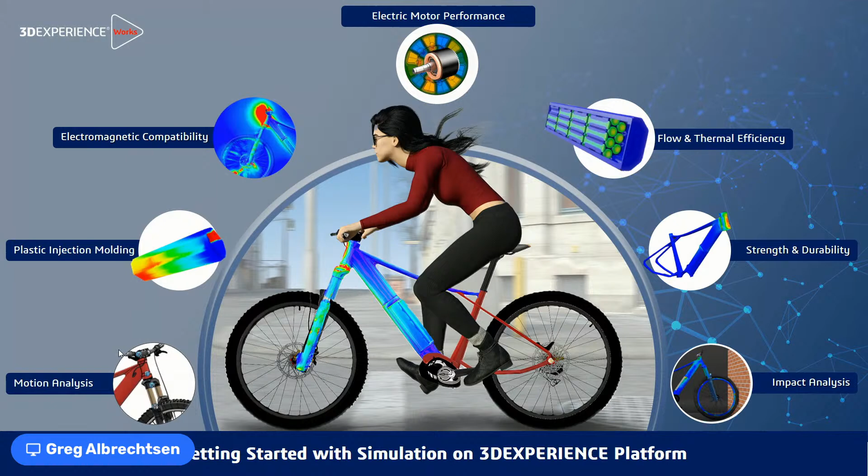So we've gone through this scenario, and again, this young lady, she's not wearing a helmet — we need to get a helmet on her, that'll be for another time. But the whole series, we're going to go through a lot of different types of simulations. I believe the next session will talk about plastic injection, and we'll go through some of that. But today we're going to do strength and structures for the frame here.

So I'm going to go ahead and close out the PowerPoint. You are a very lucky audience today because that's all the PowerPoint I'm going to show. Yeah, about our audience, by the way.

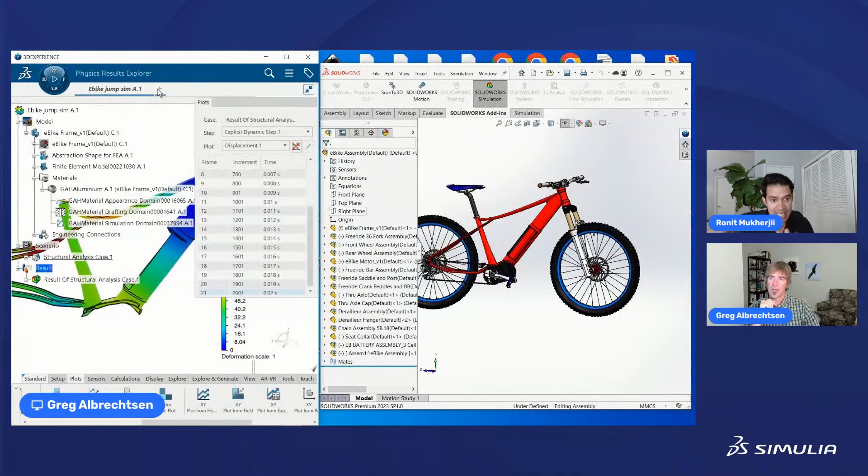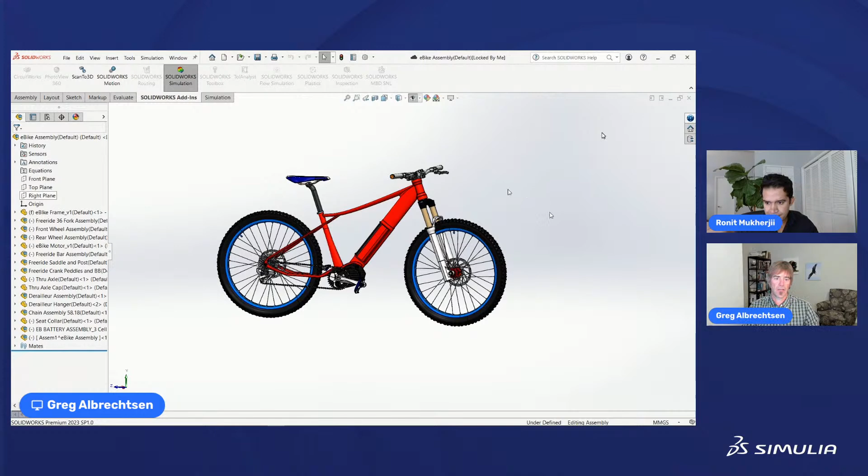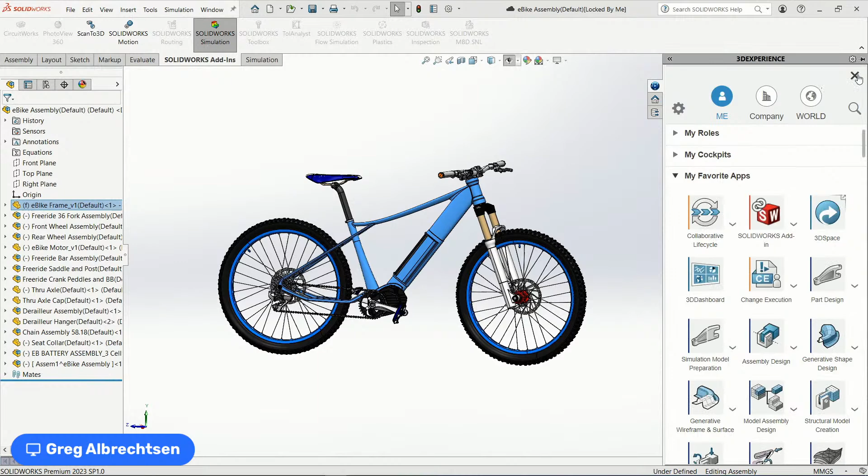Yeah, right on, thanks. Okay, so here we are in SolidWorks. I showed some different ways we get the SolidWorks information into 3D Experience — if you need more details on that, refer to some previous sessions. But I'm going to go ahead and do it. So here we are in SolidWorks with the PLM services, or UES. We get this embedded 3D Experience data manager in here, and again there's a few different ways to bring this into 3D Experience. The method I showed last time was you just highlight the item in UES that you want to open up in 3D Experience, and you can go up to the compass and pick which application in 3D Experience you want to open it in. Or we can be real fancy, and I can do a drag and drop from SolidWorks to my 3D Experience blank tab session, and voila.

Wow, that's easy, I like the drag and drop. Yeah, me too man, it's pretty sweet. It's funny doing these presentations — somebody's like, 'Hey, why didn't you do the drag and drop?' And I'm like, 'Yeah, I don't know, why not?' It's pretty interesting, the things I take for granted in the software that I just don't think of to show.

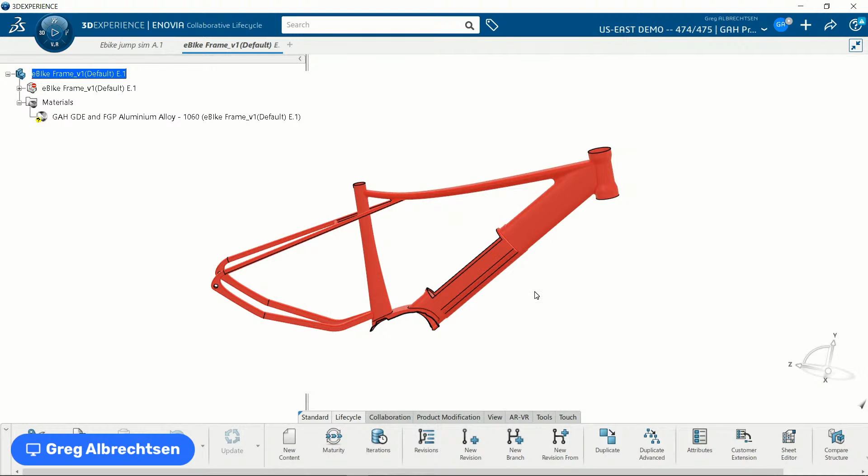Okay, so I'm going to probably be talking pretty fast, I've got a lot to show, but ask me questions as we go along. What we want to do is prepare this frame for an impact study. As I look at this frame, if you refer back to my helmet presentation, I did some shell meshing, some solid meshing, some TET meshing — so a lot of different meshing, but those different meshes were on different parts. So even though we were doing some mixed meshing, those were on different parts.

And as I look at this frame here, it's a thin tube frame. So when I first look at this as a simulation person, how do I want to do this tube? Typically, if I mesh this entire geometry with tetrahedrons, to get the kind of stress resolution I would need, I would have to have a minimum of two elements through the thickness here. And if I had two elements through the thickness on that tube, wow, that's going to make so many elements on this model.

It's just not going to give you the bending forces and bending moments that you really need to represent the displacements and the stresses. It'll probably be a little bit over stiff.

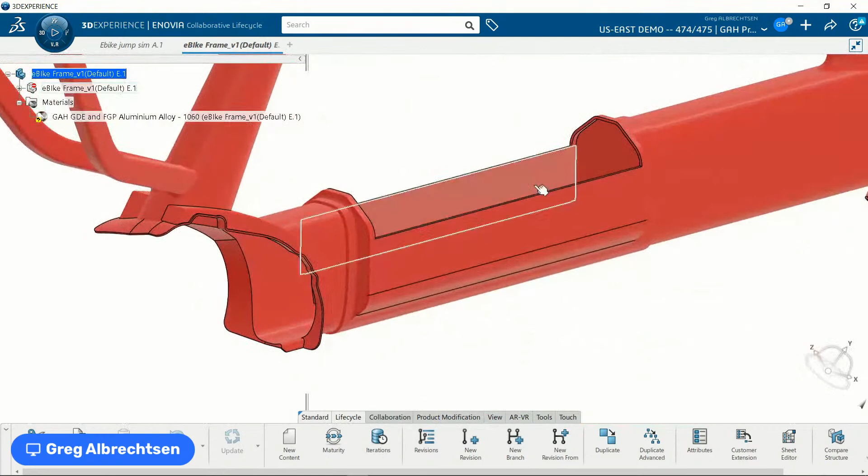So let me shell mesh the whole thing. If I think about shell meshing this whole thing, this is an e-bike, and here I have my battery compartment, which is a big solid chunky block. So if I was to shell mesh this whole thing, what happens with this section here? That wouldn't be a good approach for this section. Correct. So what do I do?

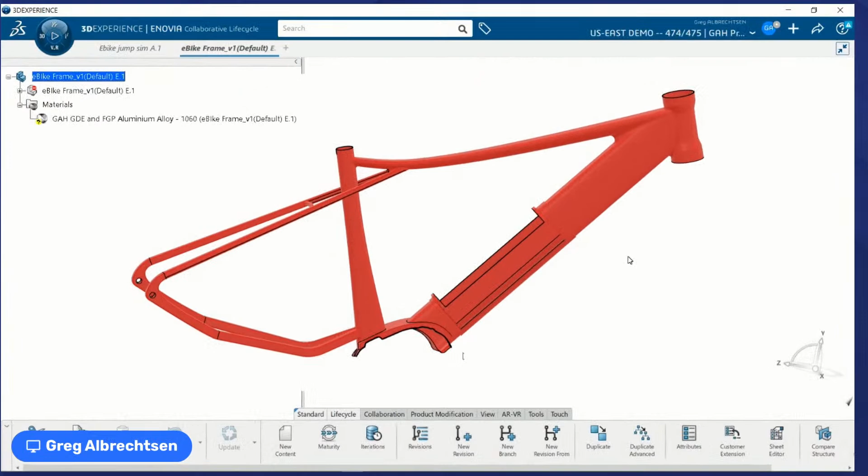Well, we have the capability to create a mixed mode mesh. I'm going to show you how I can shell mesh and solid mesh this single part. I could break this up into an assembly, but it's not really an assembly—it's still just one part, and that's how the part was built in SOLIDWORKS. So I want to use this exactly the same way that the part was built in SOLIDWORKS.

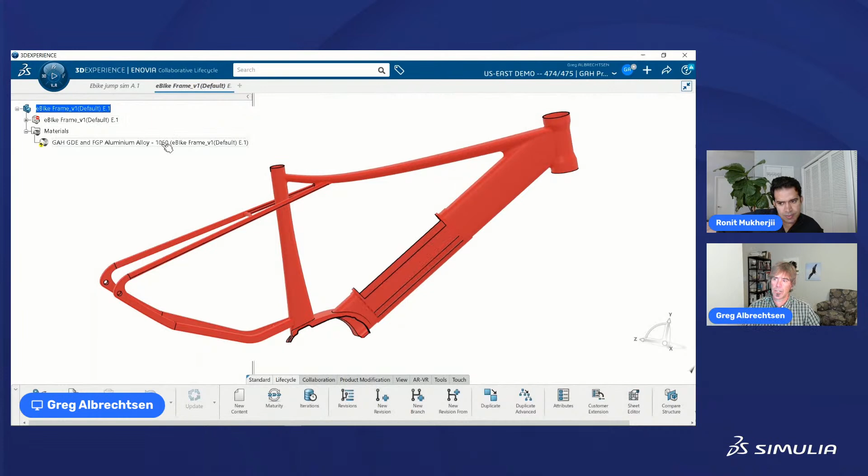First thing I need to do is prepare the geometry for shell meshing and solid meshing. So what do I need to do? As I look over at the geometry tree, here's the geometry that came through in SOLIDWORKS, with the do-not-enter sign.

So I am not able to change anything under here because we are retaining the geometry authoring tool inside SOLIDWORKS. Any change I make in SOLIDWORKS to the geometry is going to get pushed through here, and it's going to update this section of the tree.

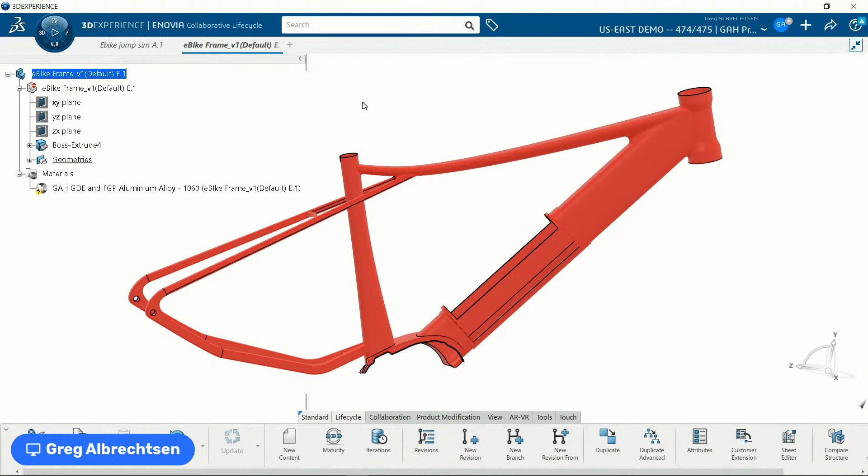That's great. That's a great point, because let's say we're running the simulation and we want to make some changes—we figure out something isn't right and we make changes. So what you're saying is you can automatically push these SOLIDWORKS design changes into our simulation tool.

Right. So I would come back here to SOLIDWORKS, make my changes, and then to bring those changes into the software here is pretty easy. I just need to go to the Tools tab, hit Global Refresh, and my new geometry is here.

That keeps things in sync with SOLIDWORKS, which is great. That saves a lot of time for setup instead of redoing the whole thing again. Quite a nice feature, I would say. Yeah, thanks, it's pretty awesome.

But I want to do some things—let's say I want to mid-surface this. Well, I could do that in SOLIDWORKS, but then I'm changing the SOLIDWORKS geometry. And if I have drawings and things like that, how's that going to affect my actual SOLIDWORKS geometry?

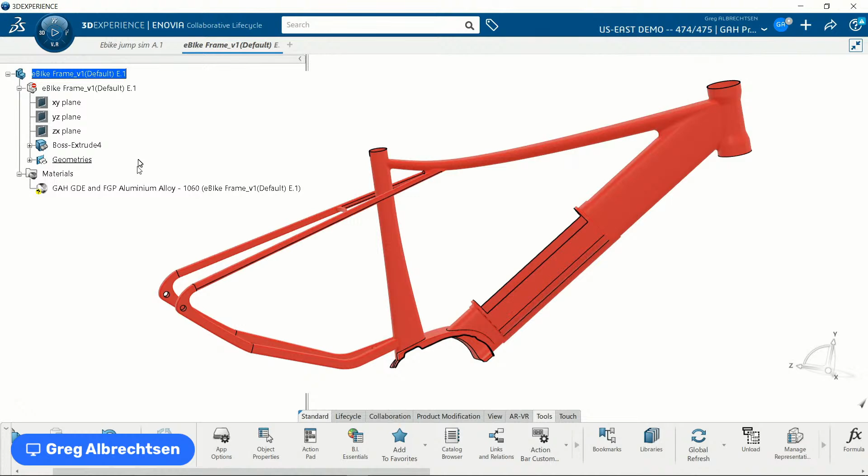So when I think about preparing a part for simulation, I like to leave my original geometry alone—let my SOLIDWORKS geometry be my SOLIDWORKS geometry—and create some construction geometry for simulation. I showed this a bit in a previous session. What I do is insert something called the abstraction shape. I went through all the different representations in a previous session, so basically I'm just creating a new representation here.

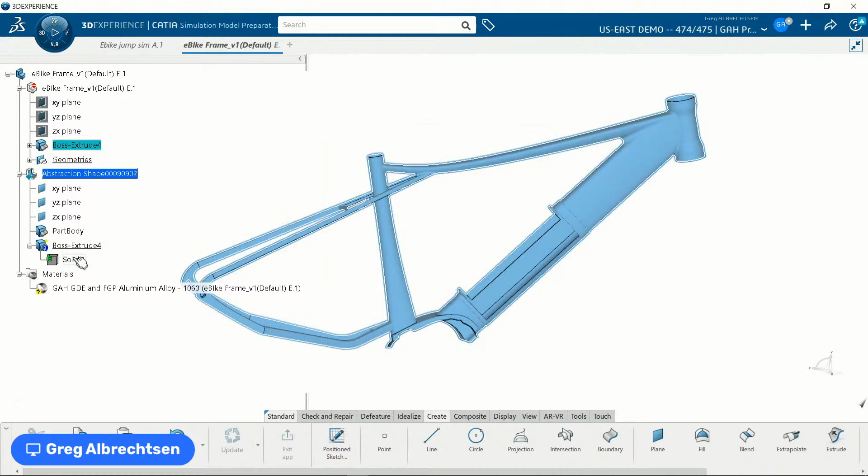What I will do is take this initial geometry that came over from SOLIDWORKS and copy it. Now here in this abstraction shape, I'm going to paste it with a link. So now this points back to that—any changes that happen in SOLIDWORKS get pushed to here, and any changes here get pushed down to here. So it's kind of a unidirectional workflow.

Right now I actually have two things visible out there, so I want to be very careful what I pick. I'm going to hide this original one—now we can just see the shape of this abstraction shape. So now what I can do is start to do some geometry manipulation of this. Let's do a partition—I'm going to create a partition, and figure out what volume I want to partition.

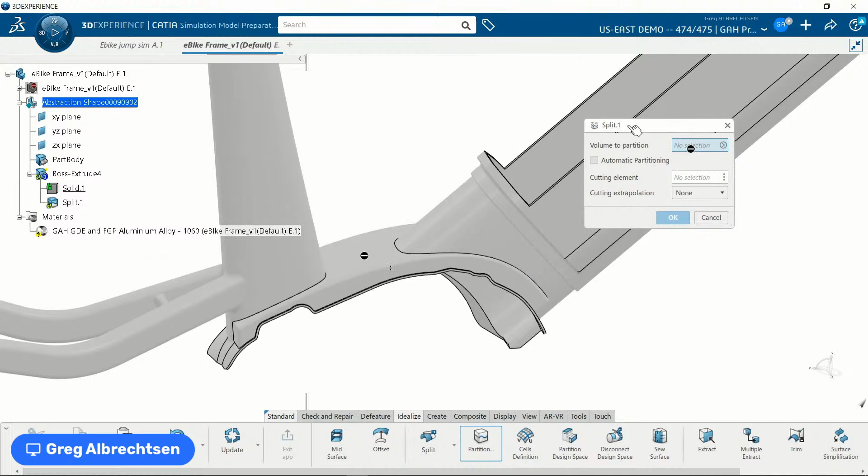And when you say partition, Greg, is this we're just splitting up the chunky body compared to the shell body? Is that what we're partitioning?

Right. So if you think of like a block of cheese, if I take a wire and cut down through the block of cheese, and then smash the cheese back together, it kind of has this suspended plane in the middle. It's still one big block of cheese, but it's got this suspended plane where I've got two different volumes of the cheese.

And for meshing, what that allows me to do is I can mesh one volume, one partition of that a certain way, and I can mesh the other partition a different way. So maybe on this side I do a coarse mesh, and on this side a fine mesh. And at that transition, because it's still mathematically one volume, it's going to merge all those nodes and elements right in that transition. So you're going to have all these really small elements at that transition, and then it's going to expand out to the bigger elements.

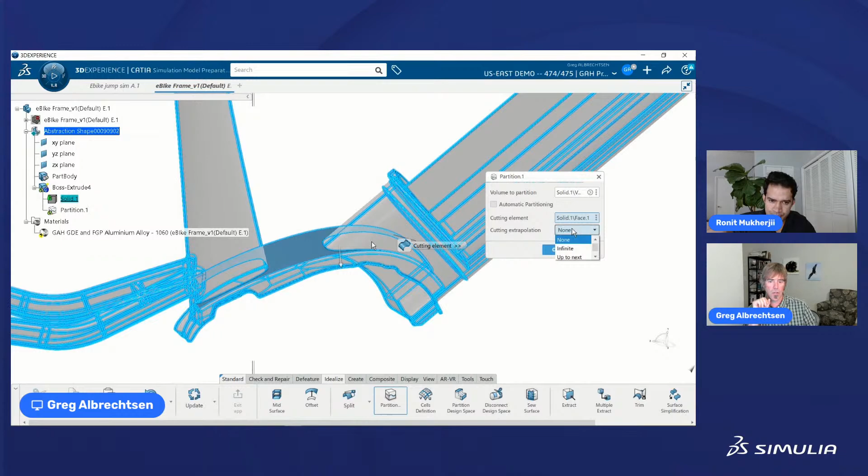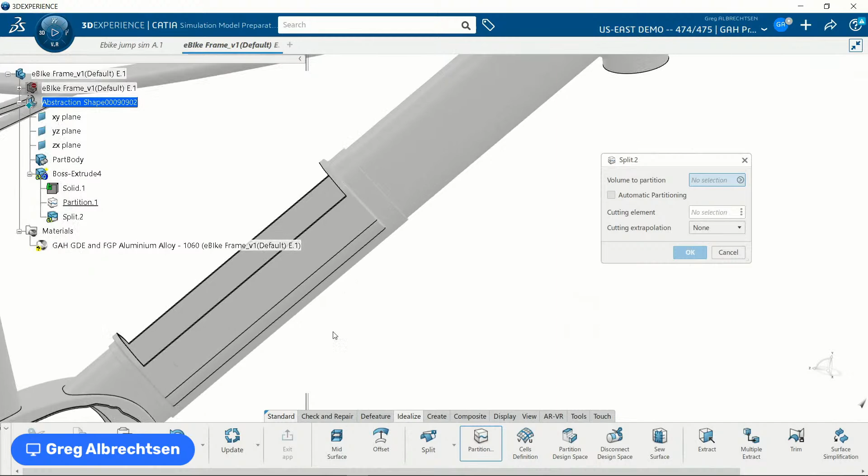Yeah, and I'm going to do that same thing here. So I'm picking this surface as a partition, and what that's going to do is put that slice right through my geometry. So now this section down here is actually partitioned off from the rest of it. And I'm going to create another partition right up here. Same kind of thing.

Let me zoom in just a little bit more. I'm going to pick that surface, and you'll see that I'm saying infinite. So what that does is take that shape of the surface and mathematically represent it as infinite, so there's no edges to it. And then if I hit OK, we can see now that my part has been partitioned right across here.

Perfect. And then my other one was partitioned right down here. So now in reality, I have split up my volume into multiple partitions. I have a partition out here, a partition down here, and then a partition that gets the backside of the frame.

Great. And the reason why we're doing this, Greg, is to be able to apply shell mesh in some places and solid mesh in others, right? So my ultimate goal is to create a solid mesh of the battery compartment, and then a shell mesh of the rest of this.

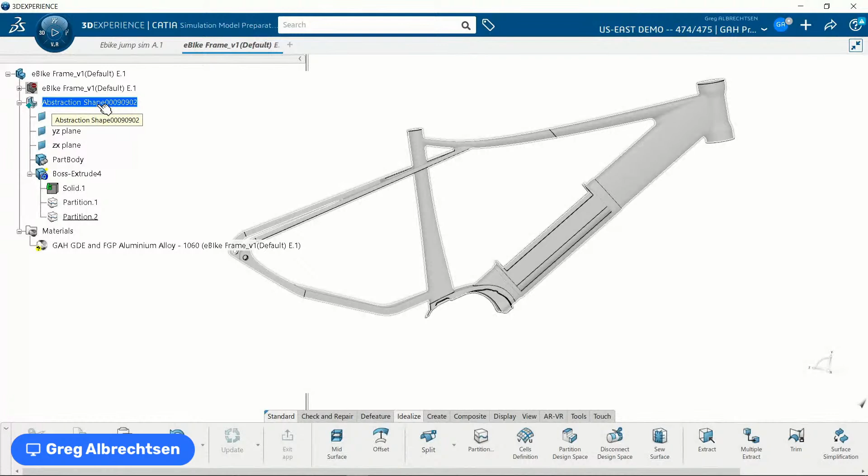Brilliant. So here, inside the abstraction shapes, I'm going to create another little placeholder called a geometrical set. And this is one of the other great powers that we have in 3D Experience. This was just geometry stuff—none of this was actually designed for simulation, except for the partition. These are just CATIA geometry features that we get because we're using the platform. So it's awesome.

So again, Greg, that's a very good point you bring out. With the platform, we have this major umbrella that we're all under, and now we have access to all these amazing applications that lie within that umbrella, and we can use that application in simulation. This whole umbrella that we're under is just very cool.

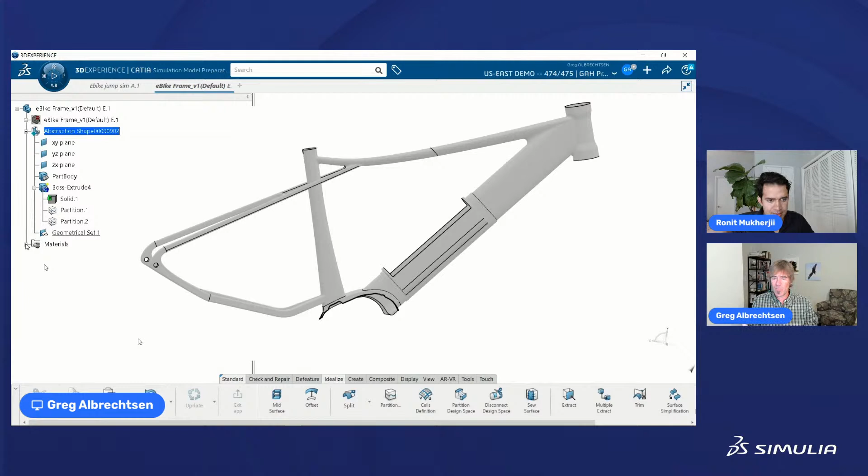Yeah, we get the data management, right? We just get all of this. Of course, we've kind of tailored some of it specifically for simulation, but it wasn't originally developed for simulation—it was developed for designing parts in a PLM lifecycle, and we just get this. It's just this added functionality.

Whenever we think of simulation or the platform, people are like, what are the physics? Can I do this type of simulation? Can I do that type of simulation? Okay, fine, that's a great thing to talk about. But there's all this other stuff that we take for granted that we get from the platform.

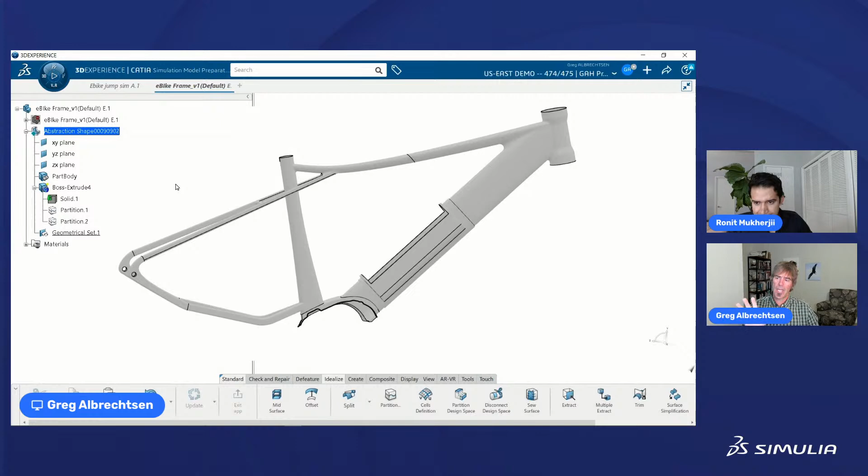That's just awesome. So with this geometrical set, this is just a personal thing that I do—I like to have all of my solids in a part body, and all of my surface entities, the surfaces that I'm going to shell mesh, in a geometrical set. You don't have to, but I just like to keep things organized. It lets me hide and show things a little bit easier. It just kind of, in my mind, I like to have those two things separated.

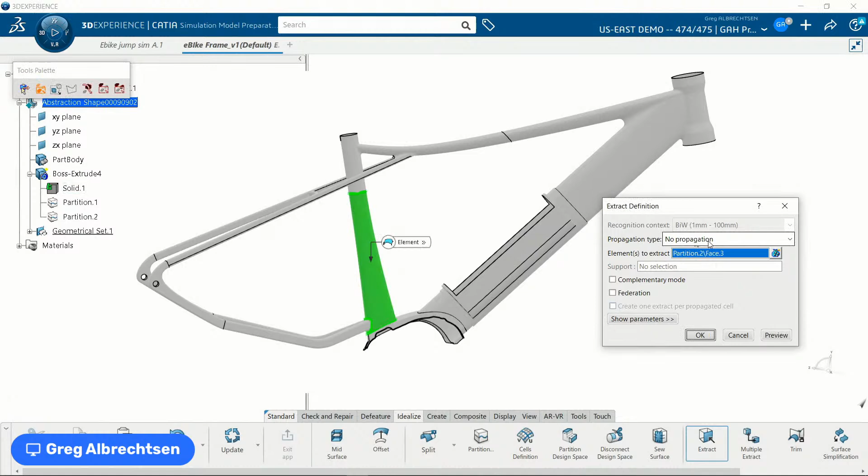So what I'm going to put in this geometrical set is an extract. I'm going to pick this surface here and say tangent continuity. So I picked that surface, and it just kind of grabbed all of those other surfaces there.

So all the surfaces that are tangent, it's automatically picking for you? Yep, it's picking all the surfaces that are tangent. So you're telling me I don't have to single click on all those to select them all? I mean, you can, but with that tool, no thank you. That's a fantastic tool. Yeah, job security, the surface picker guy, whatever. Right, yeah, it'll take all those tangent surfaces.

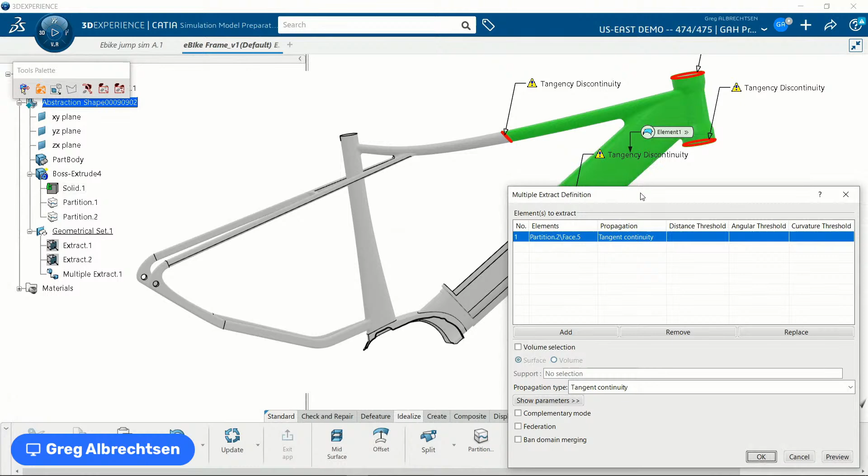And so now I have these two different ones here. I've done this in two different sections just for discussion's sake. I could have used this one called multiple extract, and I could pick this one and this one and select OK. Let me hide this. And now it's all one, and you can see that it sewed together, merged that little split right there. In reality, if I was to simulate this, that's probably what I would have done. But let me just leave it there for now, and I'm going to do some other stuff because I want to show you some things specific about meshing.

Where I have two different surfaces, this is the great thing about the 3D experiences. I have all these surfaces out here, all these different kinds of things for the surfaces, and I can just play hide and go seek all day long and keep them around as construction and use the ones I need. It doesn't really matter.

Okay, so there we are, we're done prepping this. Now let's go ahead and create a mesh. Let's mesh this thing. So how do I mesh it? I just need to go up to the compass and find the mesher. In French, structural model creation stands for meshing. So you guys learn a little bit of French today.

Because I'm doing this in a very manual way, I'm just going to create an empty fem. Automatic will automatically flavor it, taking a look at my model and trying to predict the meshes I want to put on the model. Because I'm doing a mixed mesh, it's probably not going to do that. But if you just have a solid and you're going to mesh it as a solid, I use automatic at that time. But because I'm doing a very special technique here, I just wanted to go ahead and do empty.

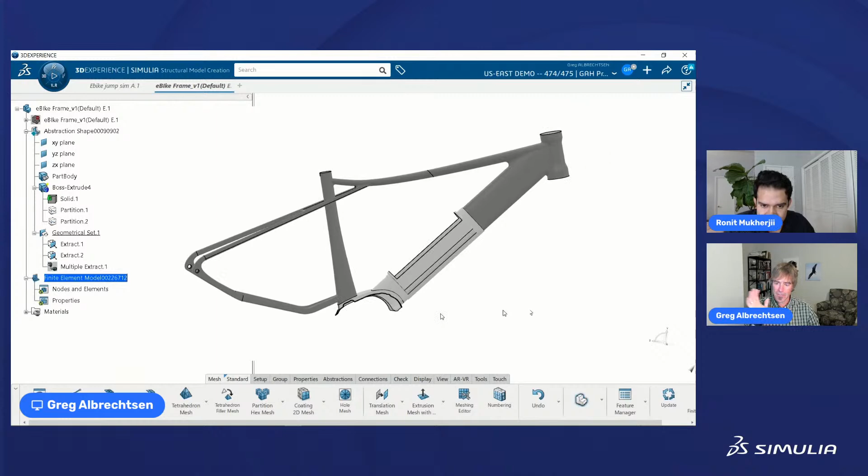Yeah, so let's mesh it. Let's do some meshing, all right. So I've gone to the meshing tab, and now I just go to Surface Quad Mesher, and I can either pick it visually out here or pick it from the tree. So let's go ahead and do that. I'll say 5 millimeters. I'm going to turn that off for now, and I'll select mesh.

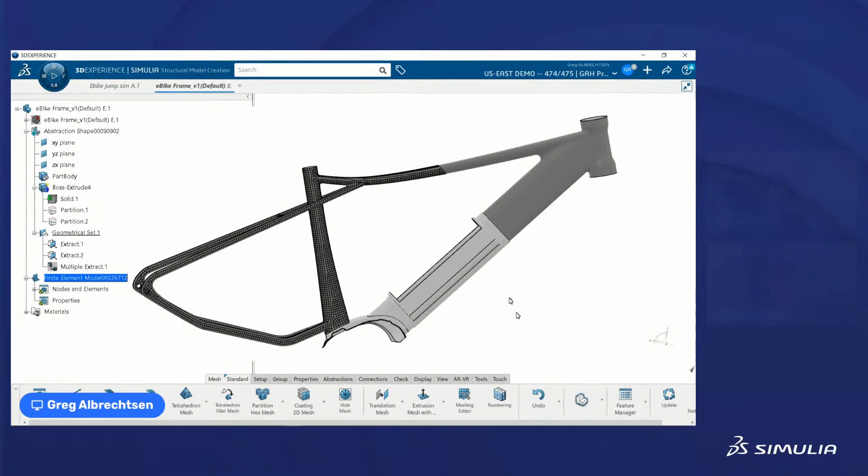We should probably point out this session isn't going to be 30 minutes like our other sessions were slated for, but I've got so much stuff I want to show you guys, so we'll go overtime a bit, at least 35 minutes or so. If you have to leave, don't—come back, or if you have to go to the bathroom, take off and come back quick, I'll still be here.

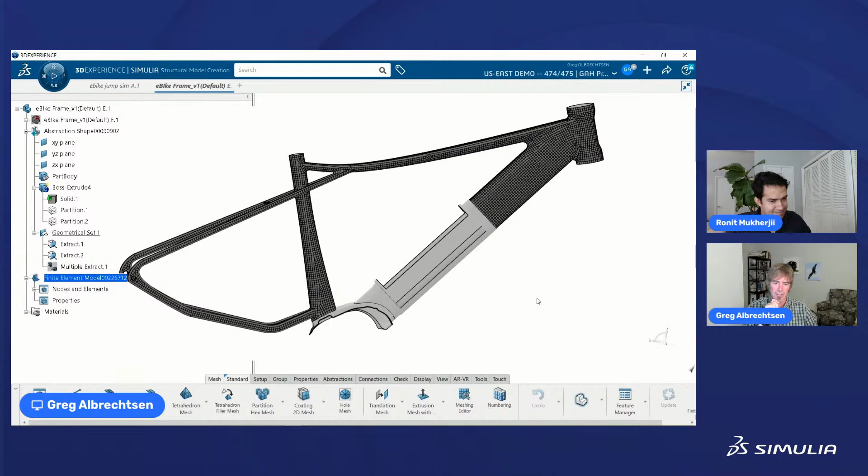I've meshed the left side, and now let's go and mesh the right side of the frame. Yeah, I'm doing this live, meshing it live—I don't like pre-canned videos for whatever reason. So I meshed both of those.

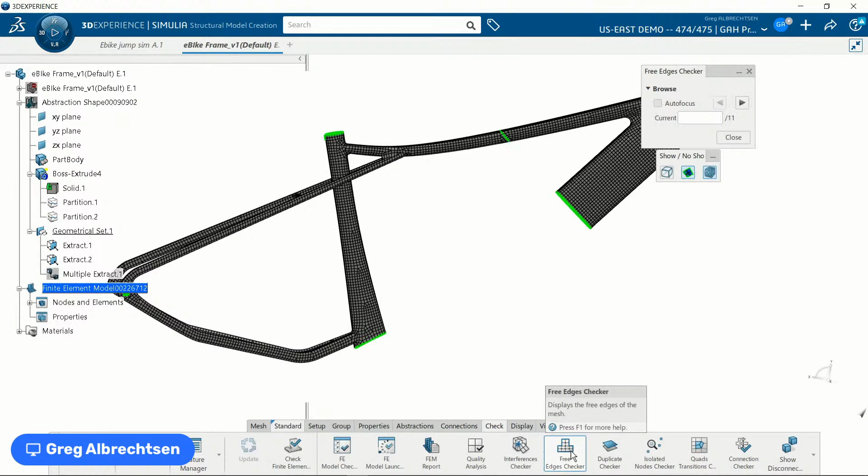Since I had two different surfaces there, let me hide the geometry—lots of hide and show today. Right where that partition was, the mesh doesn't line up very well. If I look at my checker and check for free edges, I'm getting free edges on the ends of my shells where expected, but also this free edge here. If I solve this, that means it's not connected, so it would just sit and do this.

The reason it did that is I wasn't very careful with one of my selections on the mesh. I want to toggle on this capture setting. By default, I'm not sure if this changed, but I think it sometimes shows up as 0, which is kind of a null. So I'll always have a value here, much less than the size of your mesh.

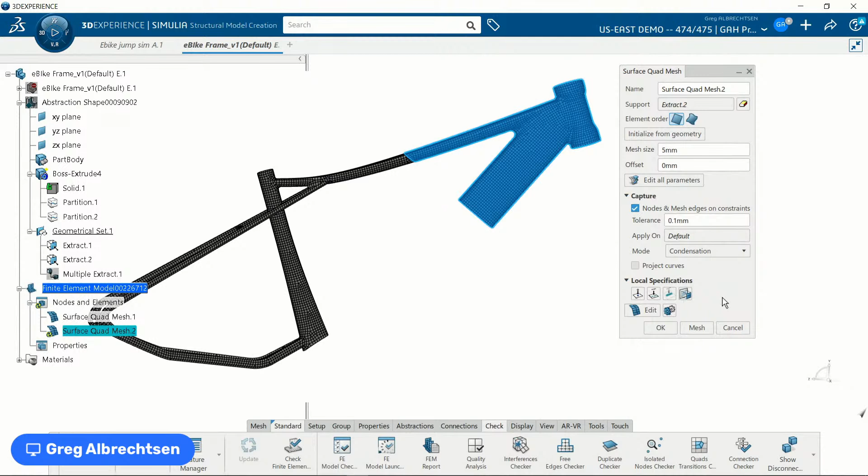If I put 0.1 in here, my mode is condensation, which is French for merge nodes. Then we have apply on, which by default is set to default, meaning it'll merge with any other meshes out there. Sometimes we may not want it to merge with all adjoining meshes, and we may want to pick specifically which mesh to merge with—for example, if I'd already meshed this bottom one and didn't want it to merge here but did want it to merge there, I could come over and pick which mesh to specifically merge with.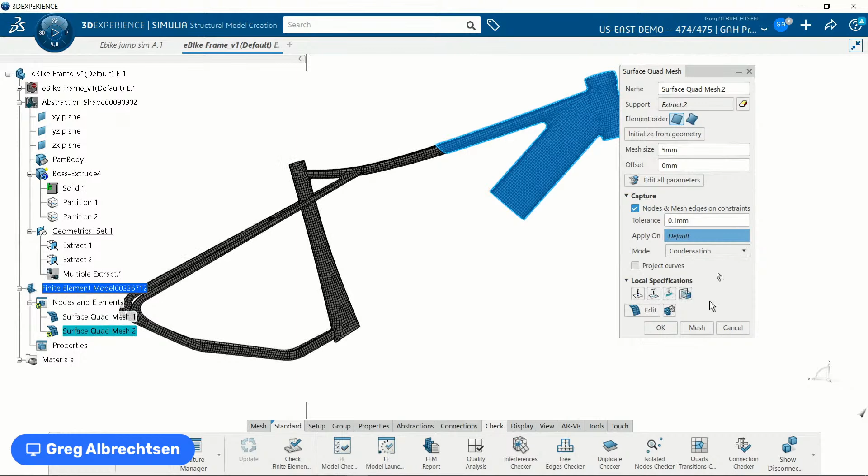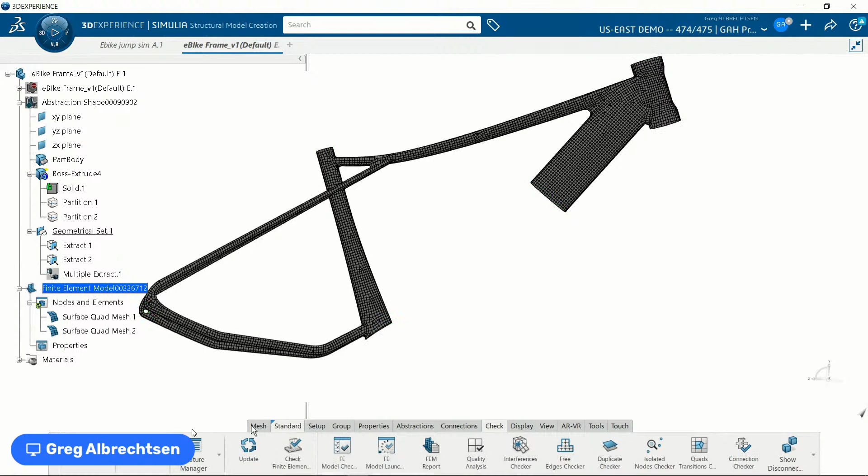So let's go ahead and remesh it, click OK. Now if I zoom in and have a look, it looks a little bit nicer—it did a pretty good job there. And if I run my free edges checker, it's all good. Now let me hide these and show this one.

Greg, your French words are becoming a little popular. I think we should continue with these.

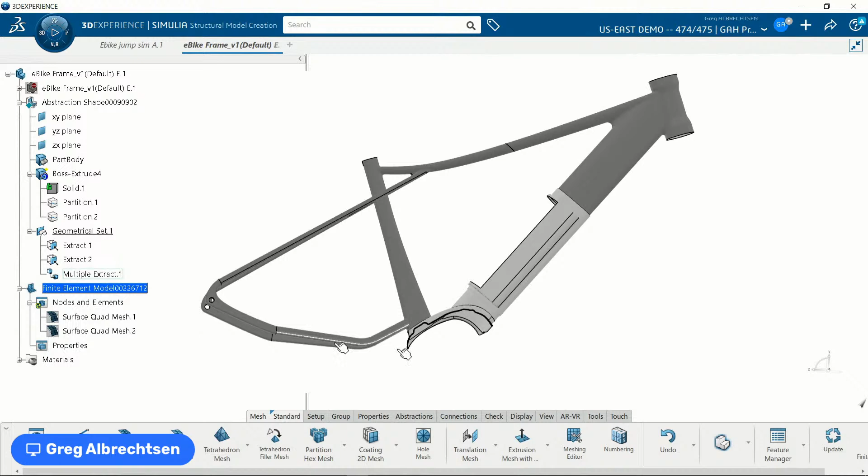Our viewer Sri Krishna mentioned in answer to our question that he uses mostly solid mesh, hybrid sometimes, but rarely shell. What about you, do you tend to stick to mostly solid meshes, or go into shell as needed? It's all about the shape of the geometry for me. Our TET meshing and solving capabilities are incredible for TETs or hex or whatever you want to use. Shells can solve much quicker because you don't need as many of them, so it really just depends on the level of detail, resolution, and accuracy in the solution you're looking for.

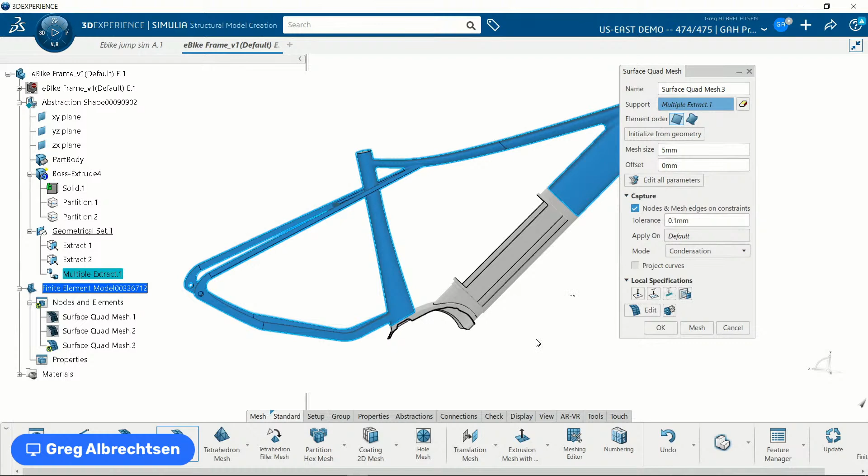But for this frame, I would do it exactly like I'm doing it here. I would shell mesh this. I would go ahead and shell mesh this. Now, if we're very concerned with the stresses here, maybe this could be another session, but I would go ahead and shell mesh this.

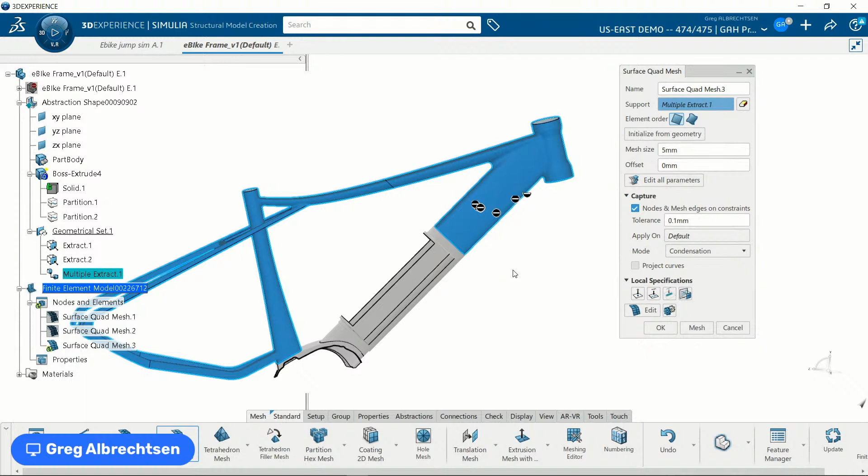What you can then do is extract out those displacement results from the shell mesh, and you could utilize those and apply them in a more detailed mesh. So I could come back in and partition out a finer area, whether I'm doing a bracket with some fillets, and then I could TET mesh that, and apply these previous run boundary conditions to that area to get more detailed results.

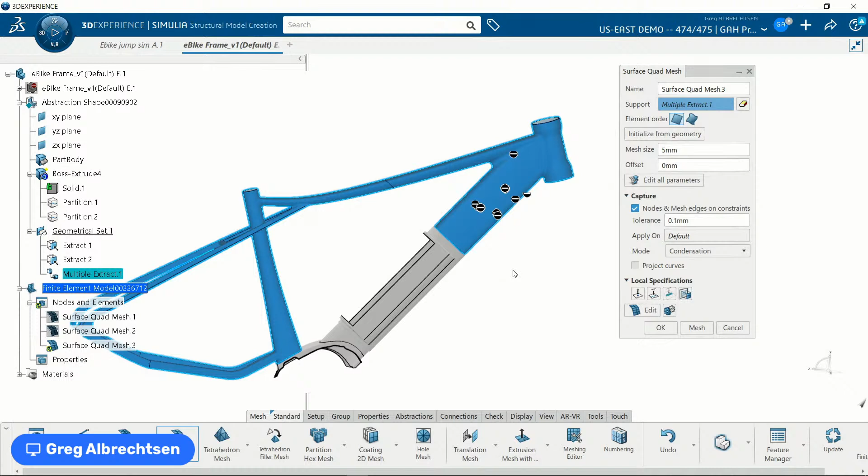So again, it just kind of depends. But for tubular structures, I would typically shell mesh it. And then for machine stuff, plastic parts, it kind of depends a lot of times on what resolution you're looking for. But hopefully that answers it.

So this time I picked this multiple extract, and I'm going to go ahead and mesh that multiple extract. And now once that's done...

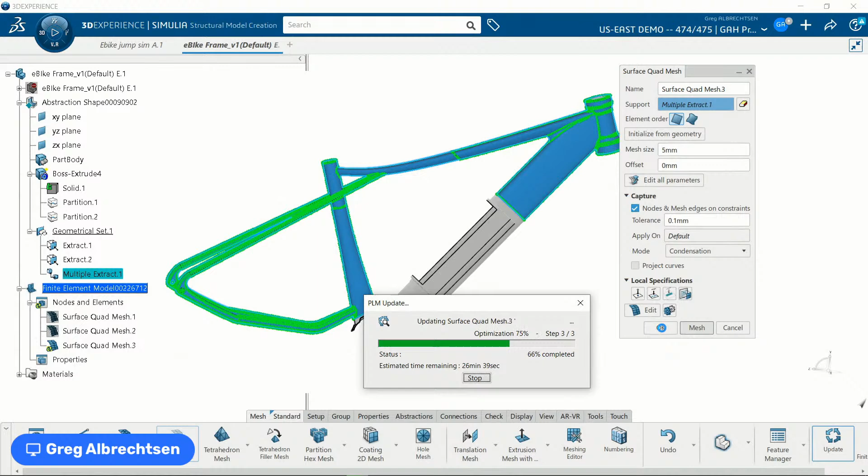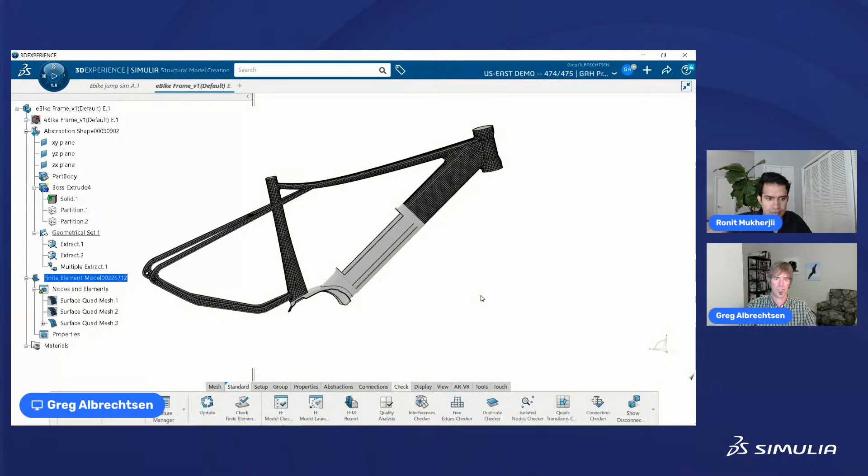Click OK. And now if I go to the checker, we can see by default there's no free edges on that one. So what happened is when I did that multiple extract, it actually sewed those two surfaces together to make them one surface. So in the geometry area, I don't have to worry about that. That's probably what I would do if I did this in real life.

But Greg, this is fantastic. These things that you're showing us, I had no idea of this. I'm learning so much from you, just from you showing these picks and clicks. And I can imagine the same thing for our viewers as well.

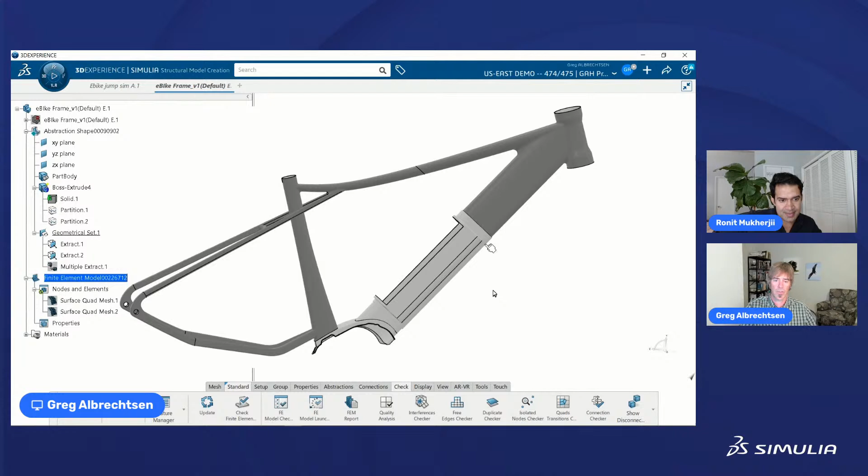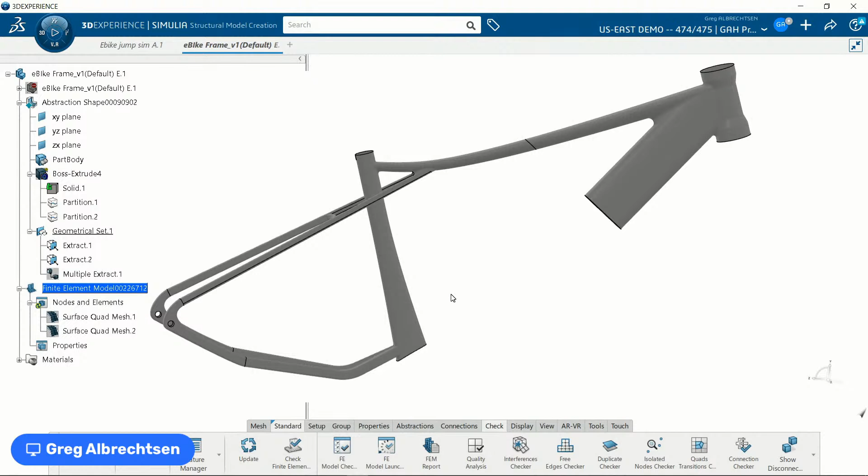Okay, I've still got this one piece left over here. I'm going to hide and show. So I've still got this solid bit out here. That's kind of weird, right? So here's that solid thing I have out there, and I still have the surface out there. So I'm showing you how I can have multiple pieces of geometry out there at the same time. But when I'm creating my meshes, I'm specifically picking those individual areas that I want to mesh.

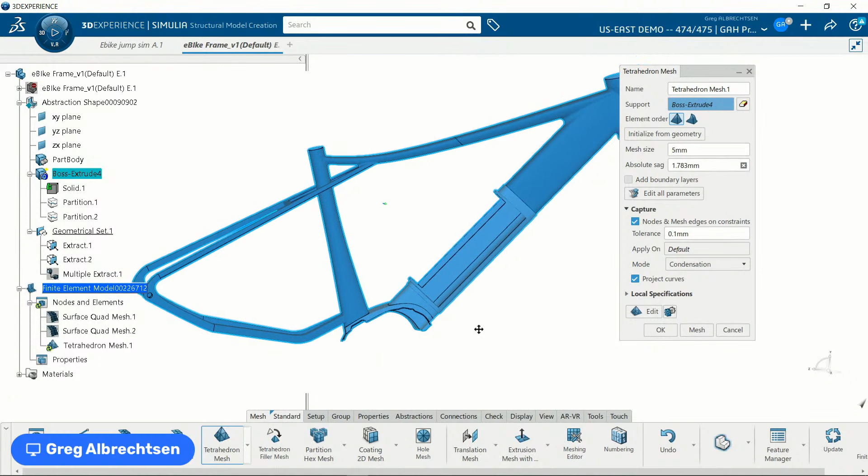So the next thing for me to do is I need to mesh this with a solid. So how do I do that? Well, I'm going to come down here to the TET mesher, and I'm going to go ahead, and you can see it's picking the boss over here. As I pick it graphically, it picks the boss, but it picked everything out there. It picked that entire thing.

What I can do with this is I can refine, and I can say keep only. And if I pick this and this, those are my two partitions that I made. So now when I go ahead and mesh that, it's only going to mesh those two partitions.

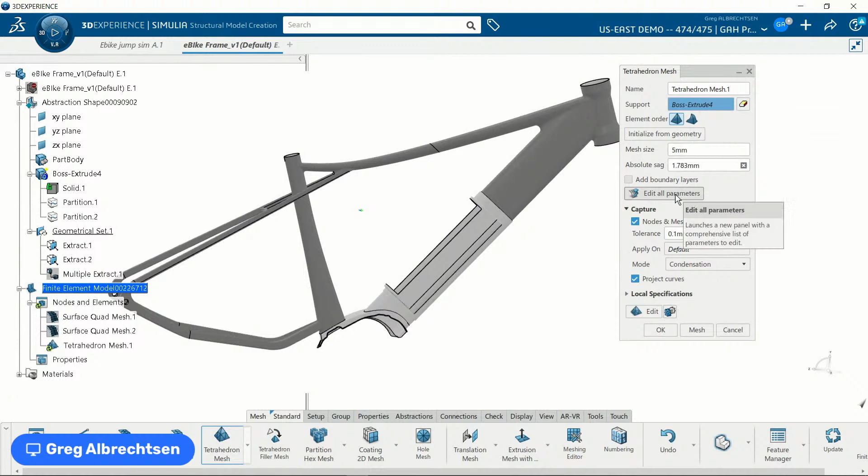I'm going to leave on this capture. And now when I go ahead and mesh it, it's going to take just a few minutes here because I've got a pretty small mesh. So I want to kind of match the two mesh sizes between these pretty close. I don't think it's going to take half an hour. I've heard that's one of the hardest things to program in software, that time prediction thing, right?

So there's my solid mesh. Now, if you remember, I'm playing hide and show here. So if I go ahead and show those, now what do you think is going to happen? So now as I zoom in here, we can see that those all got picked up really nice and clean.

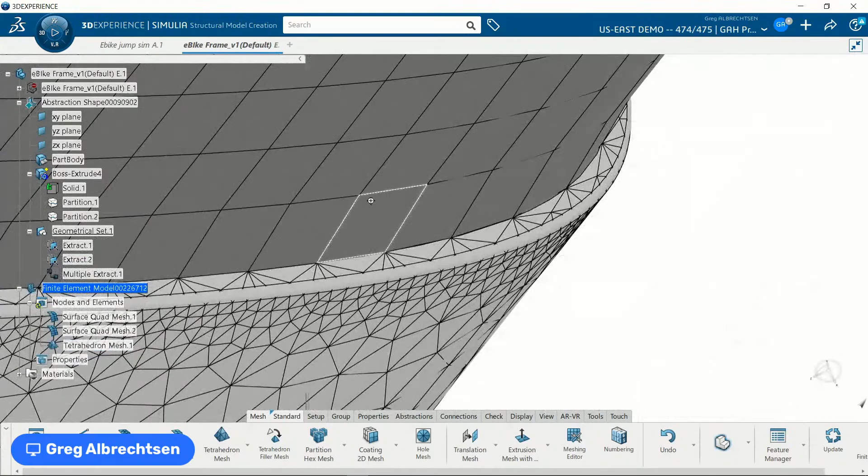And if I go to my checker, look at that. I have no free edges except where I expect them. So these are all merged, and these are all merged, and that is now one congruent, condensed, node-merged whole mesh. That's amazing. Yeah, that's pretty slick.

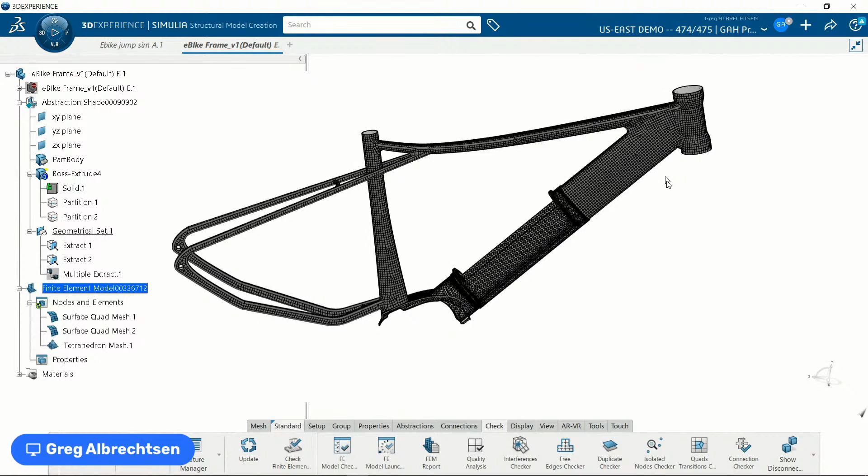So some of the expert users out there might be like, Greg, hey man, you have a shell mesh and you have a solid mesh. Shell meshes contain 6 degrees of freedom, 3 translation, 3 rotation, and solid meshes only have 3 degrees of freedom, translation only. So what happens? As this thing gets loaded up, what happens to those other 3 degrees of freedom, that rotation? How does that get transferred over to the solid here?

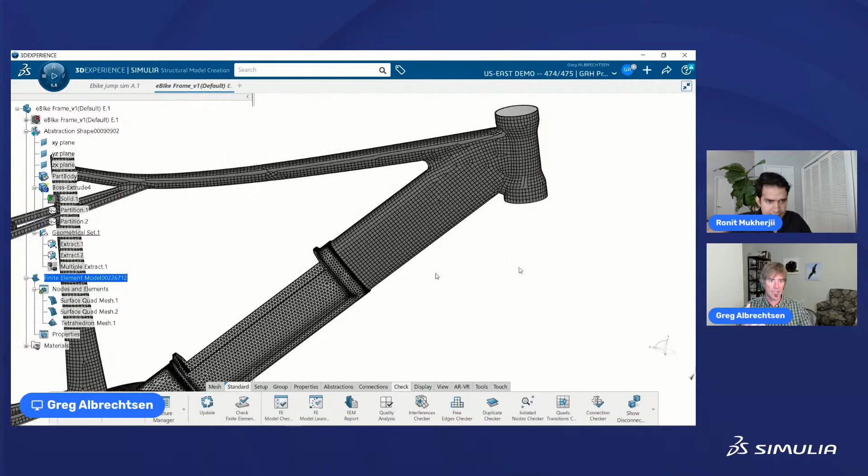Valid question. As a simulation engineer, this is where experience and knowledge comes into play. You kind of need to know what's going on. For this model, it's probably just fine right the way I have it, because I have a circular, like a tube structure, mounted down to a solid structure. So just by the shape of the geometry itself, I don't have to worry about capturing those rotational degrees of freedom, because that's all going to be taken up in the actual shape of the geometry.

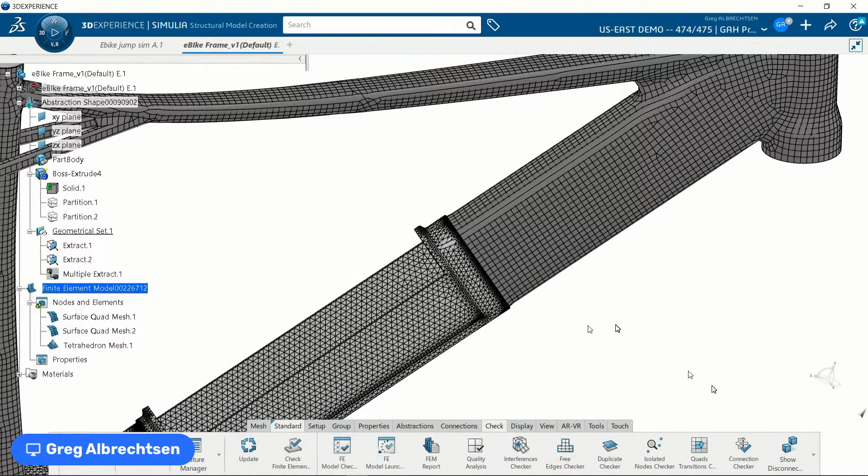Now, if I had something to show you - if I had a block and I had just a single plane come into the corner of that block, if I don't have a way to control that rotational degree of freedom, it's going to actually act like a hinge. It's just going to fall, it's going to flop. So you need to capture that rotation to get that displacement transfer from that shell mesh over to that solid mesh.

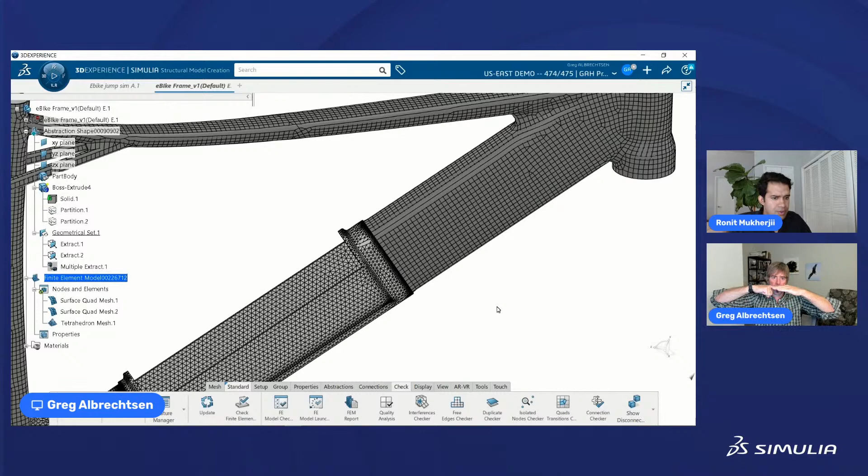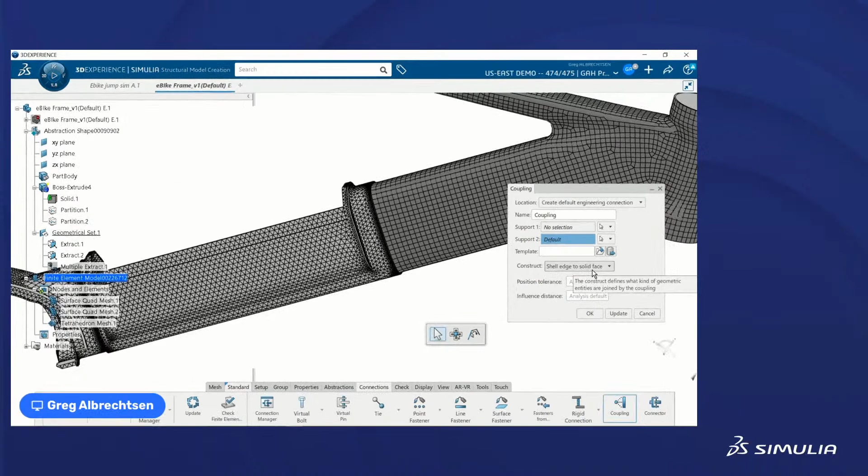Makes sense. So if you run into that kind of scenario, underneath connections and couplings, we have this very sweet shell edge to solid face coupling that will account for that, capturing that rotation. So all I would have to do now is capture that edge and then capture this face down here, and that would create a coupling between that edge and that face to then take care of that stiffness in that corner. Obviously, if you're really worried about the stresses and strains in this little joint, that's not the proper way to model it. But it's a perfectly wonderful way to model it to get your overall stiffness of your whole model, if your stresses are out here that you're most concerned with.

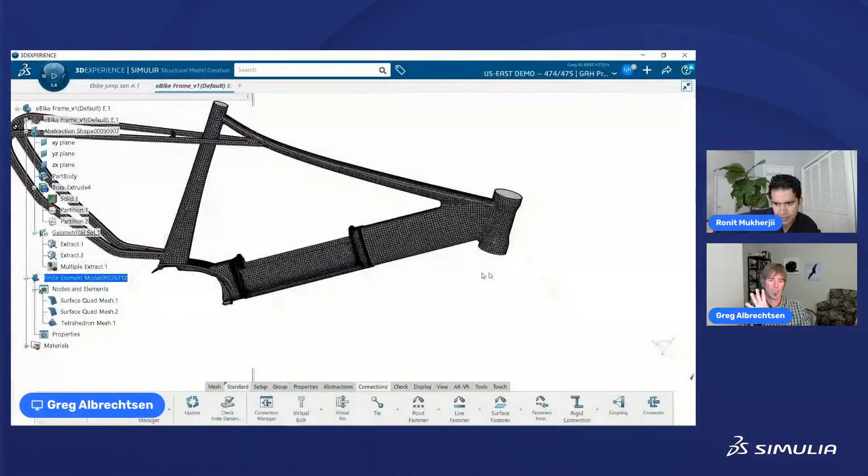So a lot of the time, that's why I would do this mixed meshing, is just to make things solve faster. And then if I'm really concerned about that junction, I will come back and do something different specifically for that.

Out of curiosity, in that junction, all of these things that we are doing, Greg, that you're showing - is it to blend those elements from shell into the solid, or is there no blending happening? There's just translation of the forces, there's not really a blending. It's just a transfer of the displacements from one to the next.

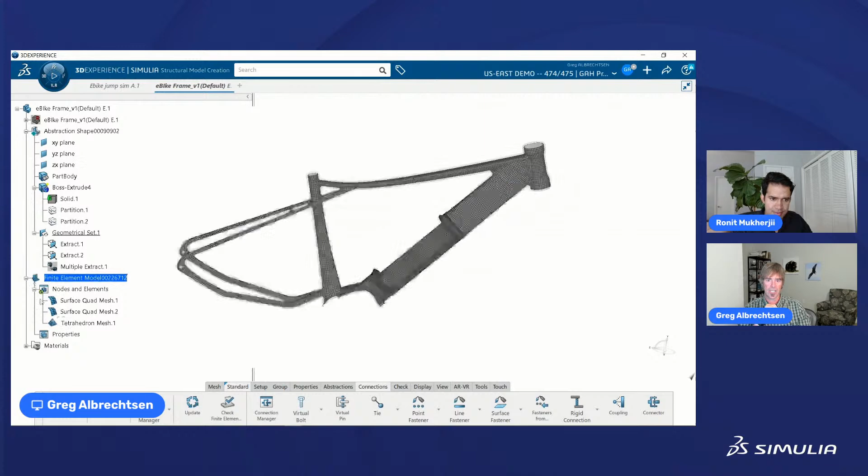Because that's all FEA is - it's one big spring equation. F equals kx. Really, that's all it is. You have a displacement, you have a K, which is your spring stiffness, and you have an F, which is force. As something moves, or as something has a force, it moves, like F equals kx. So K is basically what we call the stiffness matrix of this - it's just a big, huge mathematical matrix representing how this whole structure is. And as we know from structural mechanics, we can relate F to stress and strain through Hooke's law and some different things like that. So that's it - sorry, that's the hidden black box secret of FEA. It's just one big spring equation. And now only if all the setups and everything was that easy, right? Yeah, that's your 600-level graduate course right there, summed up. F equals kx.

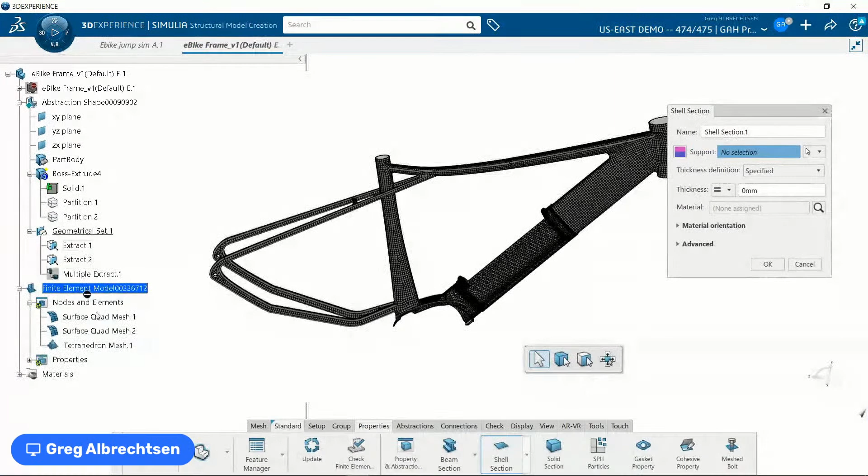Okay, so before I get this ready for a simulation, I just need a couple more things. I've got a mesh, I just need to create some properties for the mesh. So I'm going to go ahead and pick my two shells here, and I just need to apply a thickness to that, whatever it happens to be. So now I have a property for the shells, and I need to assign a property for the tetrahedrons.

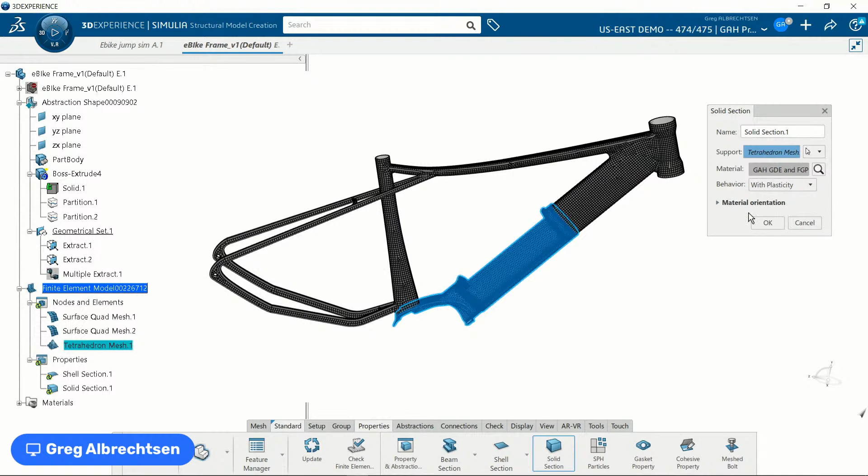So for shells, that's thickness and material, and for solid entities, I don't need a thickness because they are a 3D object. I just need to assign what material to basically assign to that. That's it. So we've got this mesh, we've sectioned it, we've partitioned it.

We've connected it all together, and now I'm ready to put my loads and boundary conditions on here. So what we need to do, if I want to do this explicit simulation, I'm going to go into mechanical scenario creation. And that's going to go ahead and create the structure and the hierarchy I need to be able to put my loads and boundary conditions on here.

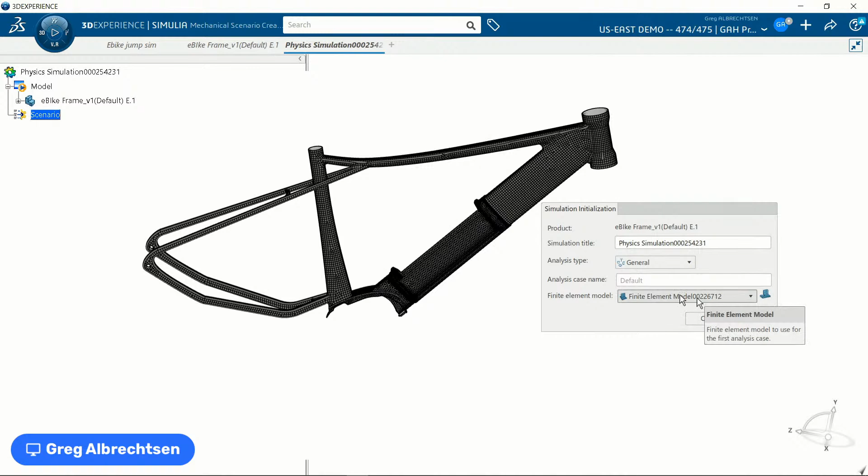As I showed in some previous sessions, we can create multiple meshes. So maybe if I mesh this all with solids, I could have one FemRep for that. I have my FemRep here with the mixed mesh, so that's the one I want to select here. And now I'm basically telling this physics simulation which one of those meshes I want to use.

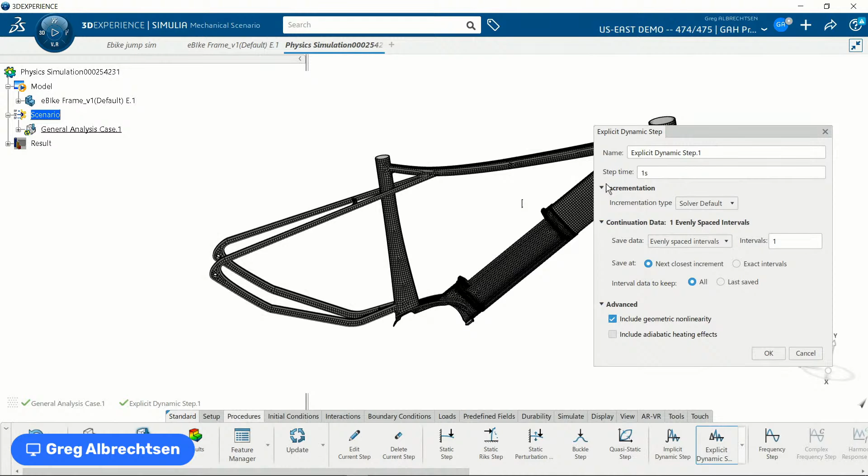All right, so for procedures, I'm going to go ahead and pick explicit simulation. And like I said early on, with explicit, it is time dependent. So in a standard simulation, this number doesn't really mean anything. We always have a 1 there, and what that means is 1 is the end of the step of iterations, 0 is the start, and it's just doing a translation until it gets to 1, which is full application of your load.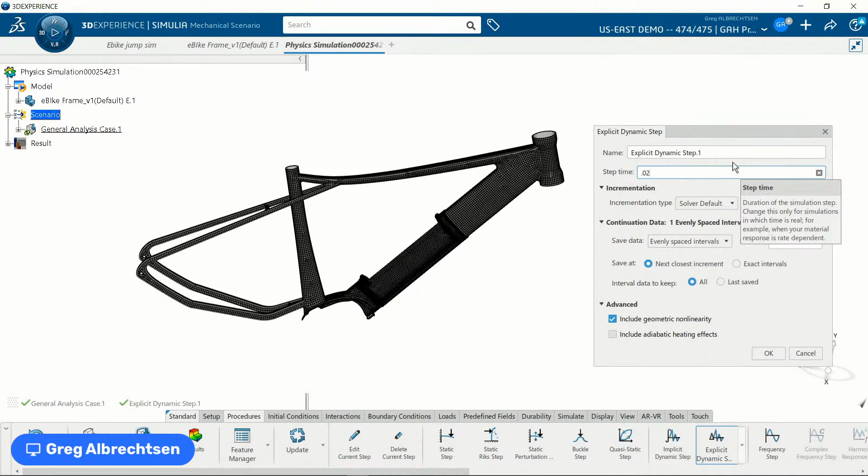Here, it's time dependent. So do I really want to run this for a full second? I don't really care what happens after the impact necessarily, like a second after the impact, because impacts are so fast. I really only need a very small time duration of that. So I'm going to put in 0.02, and there we have our explicit setup.

Yeah, question? So that small time, the 0.02 seconds - actually, if you think about it, the impact, you're right, Greg. The moment of impact is very, very, very small, so yeah, it's about in the right ballpark. And it could even be smaller than that. I don't know, I just try to start with a number, and then as I solve it, I watch the iterations to see if it was too long or too short or whatever.

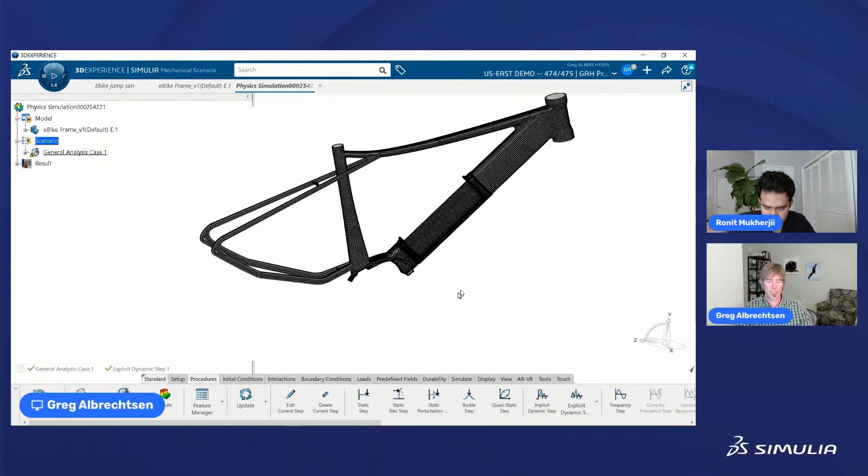But once you start doing these, you kind of get an idea of how long that duration needs to be for your loading. All right, so we've created this. Let's go ahead and put some boundary conditions on here real quick.

We're just going to go ahead and put some clamps on here. We'll clamp the rear axle. That glyph's a little too big, I can't pick anything else, so I'll go ahead and pick that one. I'll pick that one, I'll pick this one, and let's go ahead and pick the head tube up here. All right, beauty. So now I've created my clamps.

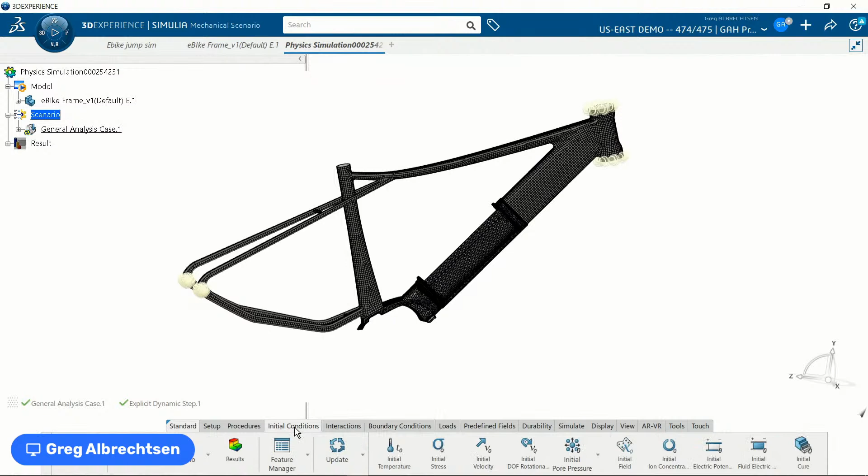What kind of loading do I need on here? Well, I need to apply some kind of loading on here, and what I'm going to do is apply a velocity. So we can calculate that from some sort of height drop, 1/2 mv squared, with mgh in there, and I can calculate my velocity - some potential and some kinematics.

Or I could just be like, you know what, I am a wicked mountain biker, and I am going to come down hard, whatever we want to put in here. So I'll put in the velocity, I'll put in the translation related to the global axis. And I think I may have missed telling it what that was actually applied on.

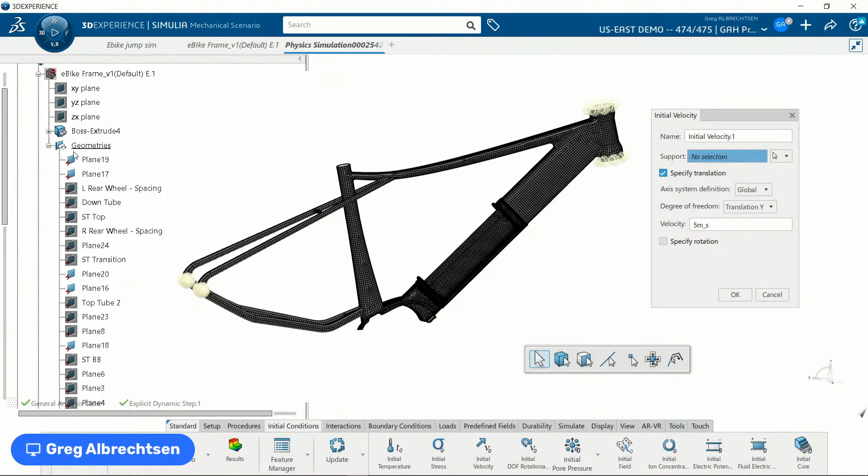So I didn't pick any. So I need to apply that to my...

We were just excited to go fast. So yeah, I just wanted to go fast. Yeah, see, I was actually going up, so that was... Yeah, I'm glad I came back.

Greg, just to kind of make sure we're in consideration of everyone's time, we've got a few minutes left, so can we wrap up and show some results? That'd be fantastic. Yeah, getting super close.

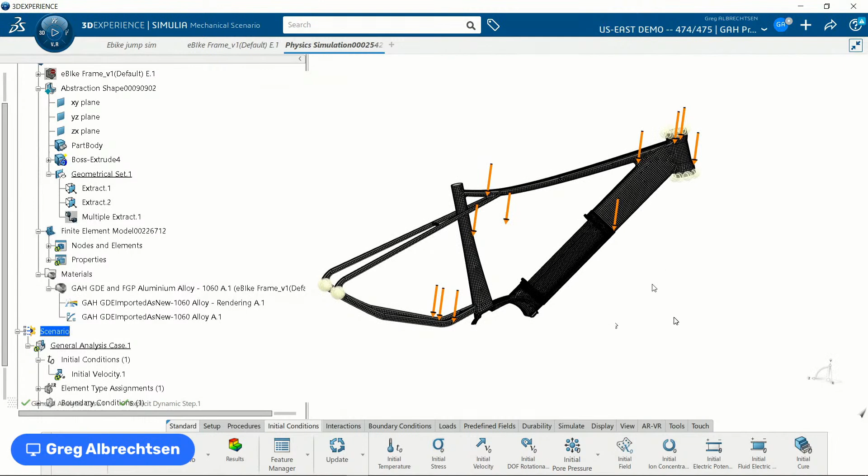So the only other thing I have left is gravity. So we've got some loads, and I want to put some gravity on here, and I'll put it on the whole model. And because I work in a weird sort of space, Z is apparently not up, so we'll just use -9.81 and this... there we go, we've got some gravity.

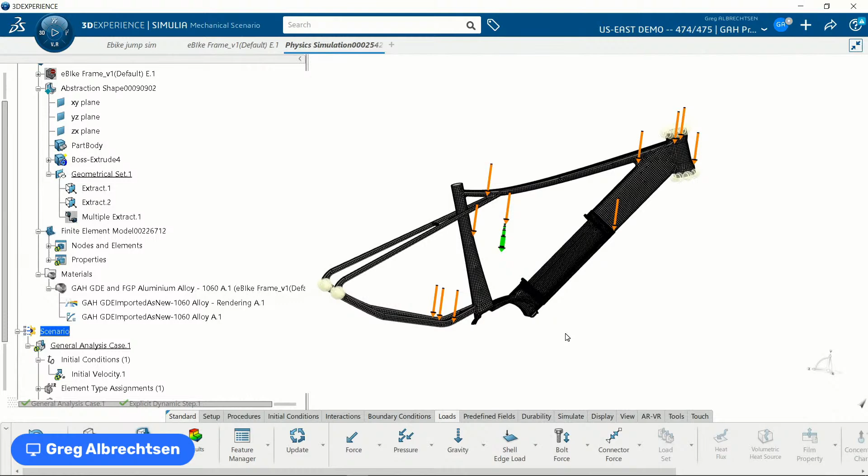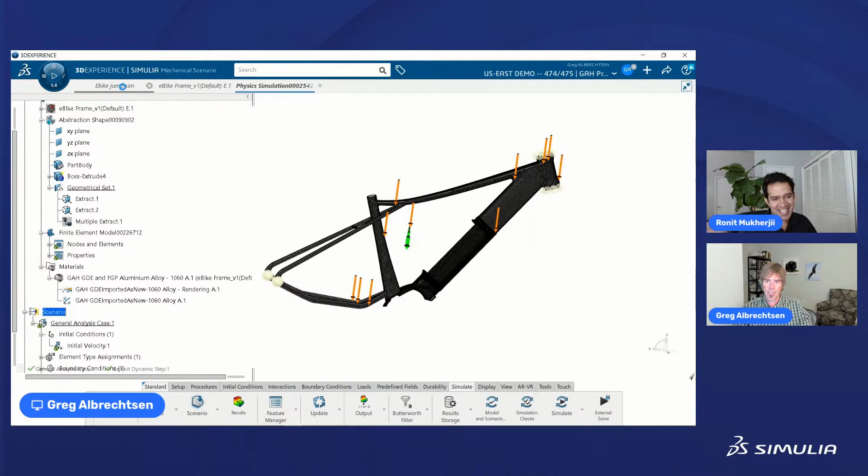So I've got my mesh, I've got my materials, I've got my properties, I've got my loads, I've got my boundary conditions. I've got everything set up. I'm ready to send this off to the solver, so I would click simulate and send this off to the solver. But, as any good cooking show that you watch on TV, I have a pre-baked pie for us - I've already gone ahead and cooked the pie.

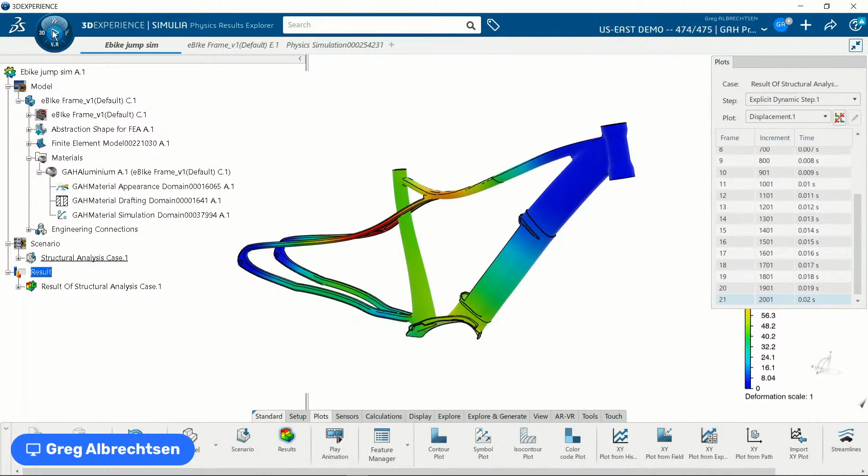Yeah, this is great. Can you show some animation of how that happens? I'm sure there's a way to animate this to see how that animation happens. Oh, there it is, it's just the play button. How cool is that?

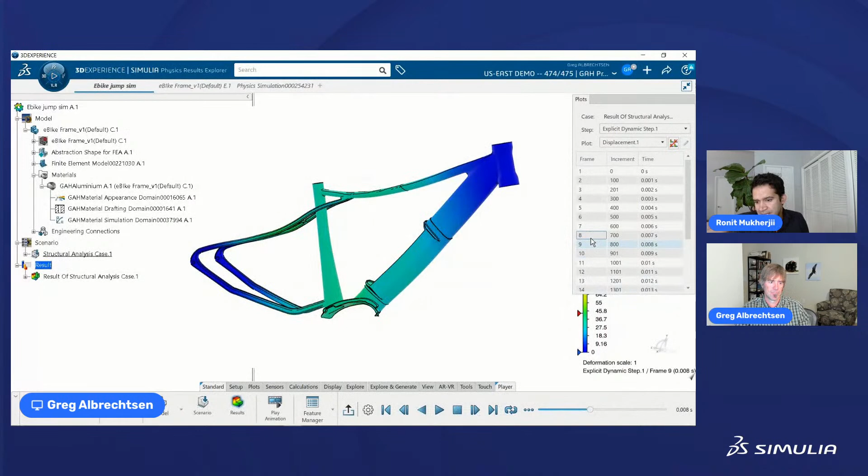Especially if I am working on an e-bike frame or any bike frame, and I want to understand how this impact works, or even how stresses work, I don't have to go make a bike model or get a physical prototype done. I can test these things here in this powerful tool, and then finally go make one or two prototypes and test them, compare the results with my simulation results, and be happy.

Especially for different drops, like a cell phone drop, different drop heights, different drop angles, all of this - I think we're going to cover that in a later session, doing some DOE, designs of experiments, where I can set up all these different loading parameters: drop heights, jump heights, rotation angles. We can set this up and let the software solve a thousand different iterations or variations of the design, and then you can go in and predict that specific one you want to use.

So yeah, that's fantastic. Great job, Greg. Thank you for all the work.